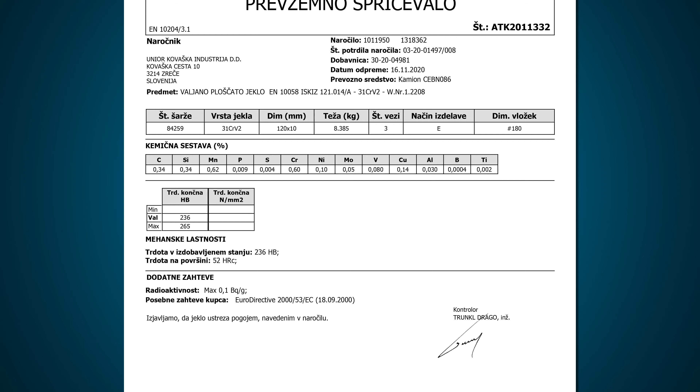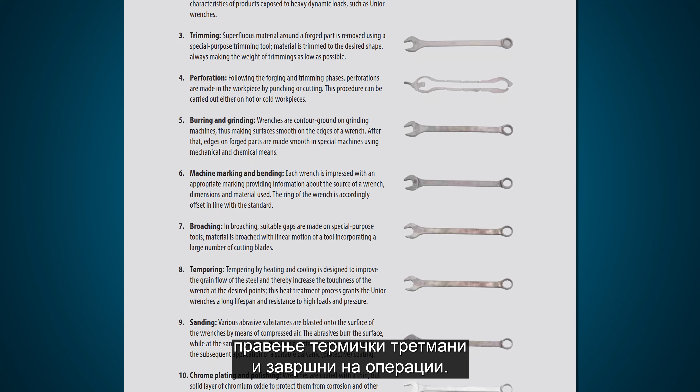All Unior wrenches are made from top-quality chrome vanadium material, which is tracked from the beginning, where the raw material is made, until the final production process when we hand over the product to its end user. During production of the wrench, we use different production processes. We start by cutting raw material, forging half products, machining to tolerances, doing heat treatments, and finishing operations.

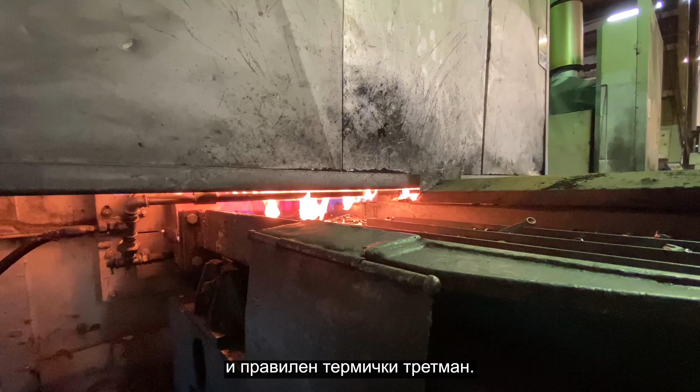The most important characteristics of the wrench are precision and strength. The precision of the working end of the wrench is guaranteed by a stable work process on modern CNC machines, while the strength of the wrench is achieved by using proper material and proper heat treatment.

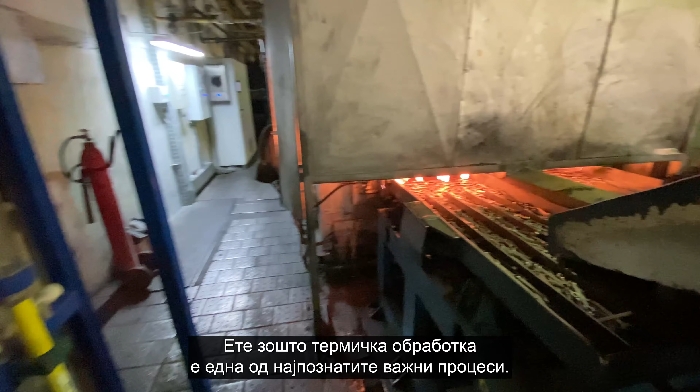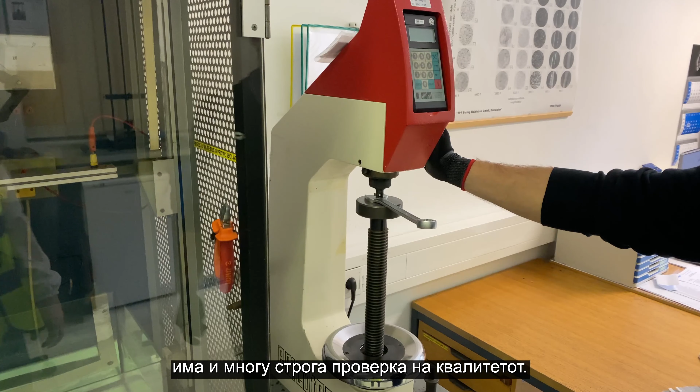As noted before, heat treatment determines the strength of the wrench. That is why heat treatment is one of the most important processes. We do our heat treatment in our own computer-guided furnaces and monitor the entire process at all times. At the end of heat treatment, there is also a very strict quality inspection.

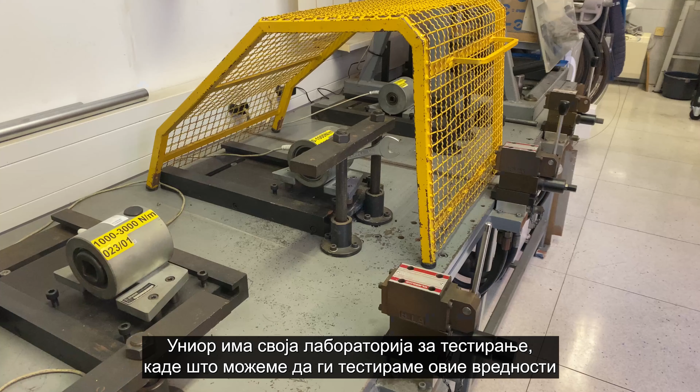Shape, size, and all the other measurements of the wrenches, such as thickness, length, width, hardness, etc., are determined by ISO standard. All Unior standard wrenches are made in accordance with ISO standards. The standards also determine what torque value each size of the wrench has to withstand.

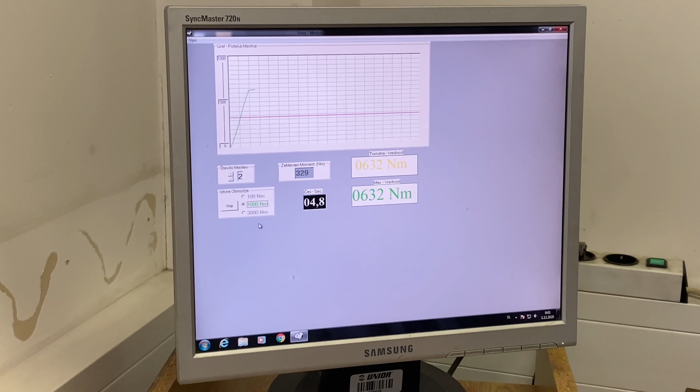Unior has its own testing laboratory where we can test these values for every produced series of wrenches. Unior wrenches are designed in such a way that the strength of the wrench exceeds the requirements of the standard for minimal torque by at least 50%, and at some sizes even more.

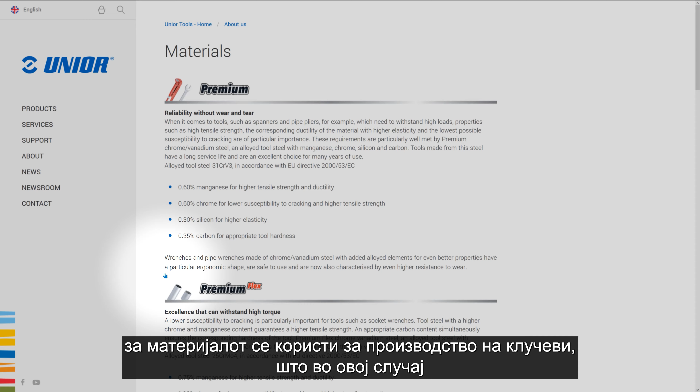When we click on the open-end wrench icon, the basic information about the wrench opens, namely about the material, the method of production, its surface, and information about the standard according to which the wrench is made. If we click on the material icon, we can find more detailed information about the material used to produce wrenches, which in this case is premium chrome vanadium steel.

This material is used for the production of wrenches due to its properties such as high tensile strength, the corresponding ductility of the material with higher elasticity, and the lowest possible susceptibility to cracking. If we return to the open-end wrench page and scroll down, we get to the dimensions of the wrenches. Each wrench has two different opening dimensions. Usually dimensions are consecutive, but different combinations of dimensions are also possible.

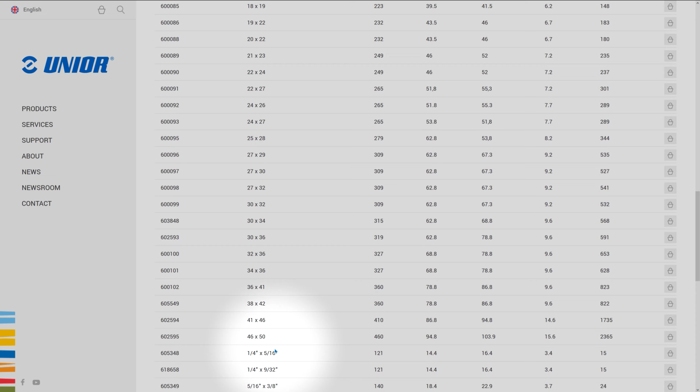One dimension can be combined with larger dimensions. For example, the number 13 can be combined with 10, 11, 12, or later with 14, 15, 17, and so on. Different markets and different maintenance work require different combinations of wrench, which is why there are so many different combinations. In addition to metric dimensions, wrenches can also be obtained in inch dimensions. If we scroll further down the page, we can also see a description of the different uses. Almost the same characteristics also apply to other types of wrenches.

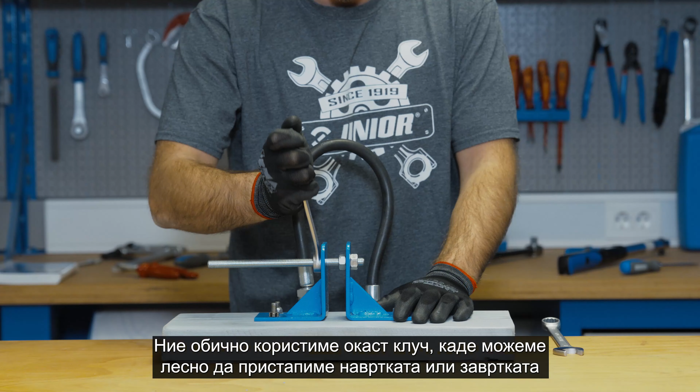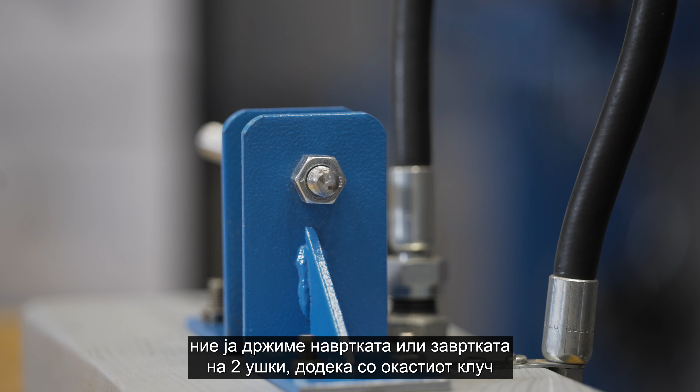The difference between an open-end wrench and a ring wrench? We usually use a ring wrench where we can easily access the nut or screw and tighten or loosen it. Where a ring wrench cannot be used to access the nut, an open-end wrench is used. The difference between the two wrenches is also that with an open-end wrench, we hold the nut or screw at 2 points, while with a ring wrench, we hold all 6 points on the nut or screw. In this way, the ring wrench can be used to tighten or loosen with greater force, while the possibility of slipping out of the nut or bolt is lower than with the open-end wrench.

The ring wrench is divided into several different subcategories. The most familiar to users is the offset ring wrench. We also have a flat ring wrench, a ring wrench with a ratchet and wrenches for special purposes, a wrench for scaffolding, a wrench for working at heights, and wrenches with a special profile.

In addition to the usual ring wrenches, we also have some ring wrenches for special purposes. An open ring wrench, which is used for installations, hydraulic lines, pneumatic lines, and in cars for servicing brake lines. A one-sided offset ring wrench, where several wrenches are used with one handle and is intended for screws that are tightened more than conventional screws. With this wrench, we can apply more torque as the handle is longer and we have more lever.

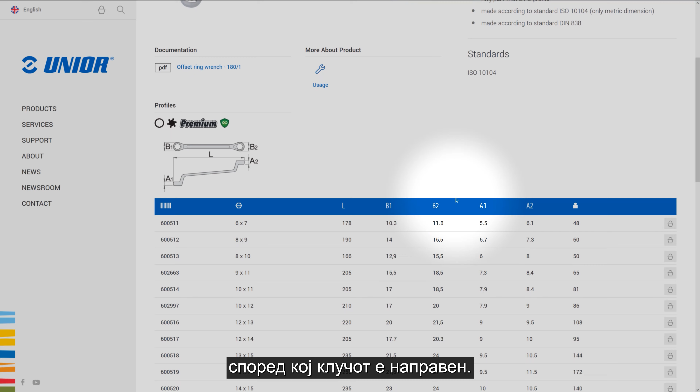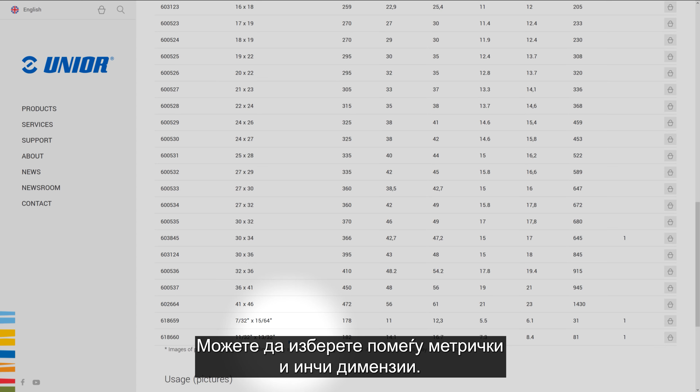A ring slogging wrench, insulated wrench, special wrench for quick work, or ratchet wrench. Here, we also find all the sets that contain a ring wrench. When we open an offset ring wrench, we see that we have 2 dimensions on one wrench. On the right side, there is basic information about the wrench, the material, the method of manufacture, its surface, and information about the standard according to which the wrench is made. At the bottom of the page, there is a table of dimensions and different combinations. You can choose between metric and inch dimensions.

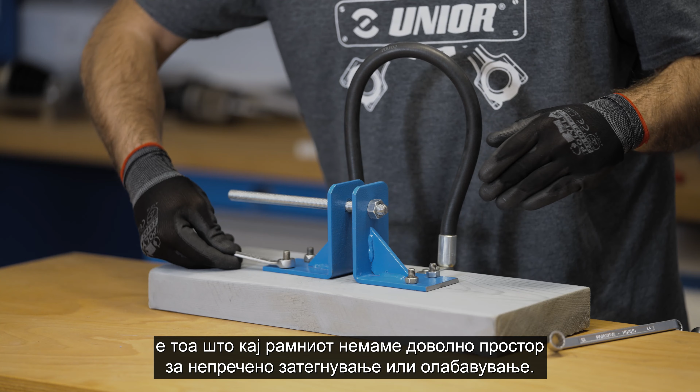In front of us, there are 2 versions of the ring wrench. The first one is a flat ring wrench. The second one is an offset ring wrench. The difference between these 2 versions of the ring wrench is that with a flat wrench, we do not have enough space for smooth tightening or loosening. Therefore, in such cases, we use a curved ring wrench, where there is enough space between the base and the wrench for smooth screwing or loosening.

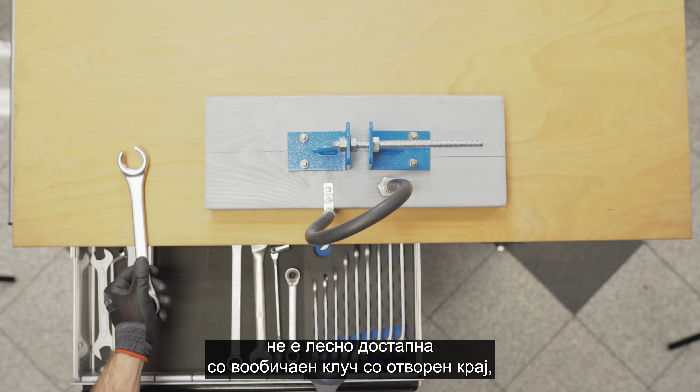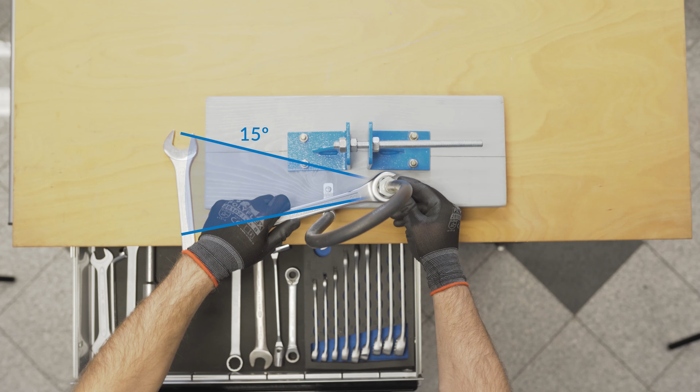In cases where the nut that we want to tighten or loosen is not easily accessible with the usual open-end wrench, we can use an open ring wrench. As you can see, with a normal open-end wrench, a 30-degree turn of the screw is required so that the wrench can be removed and again replaced at the same angle as the first time on the nut. When using an open ring wrench, only 15 degrees is required for optimal operation.

One of the subcategories of ring wrenches are combination wrenches, i.e. the combined open end and ring side. We have an open end wrench on one side and a ring wrench on the other. Both have the same dimensions. The wrench can thus be used for several different uses. A standard combination wrench exists in 2 options, a short and a long version.

We also have subcategories of special combination wrenches. The first of these is the ibex combination wrench, which is designed for quick work, the combination wrench for working at heights, the combination wrench with a ratchet on the ring side and for working at heights, and the combination wrench with a folding ratchet. On this part of the website, we can also find all the sets that contain these wrenches.

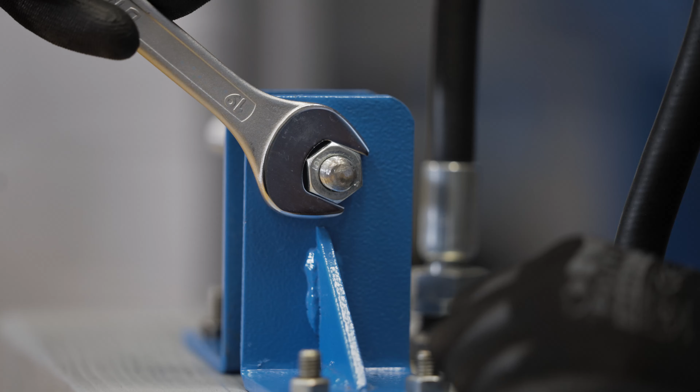Compared to an ordinary open-end wrench, working with an ibex wrench is much faster, as we don't need to take off the nut or bolt during tightening and loosening. The ibex combination wrench has a 3-point grip. That means the force is divided into 3 points on the nut and not only 2, as is the case with a regular open-end wrench. At the same time, this ensures a 100% grip for the wrench. The wrench profile ensures that the nut is safe from damage when tightening, as the force does not act on the corner of the nut.

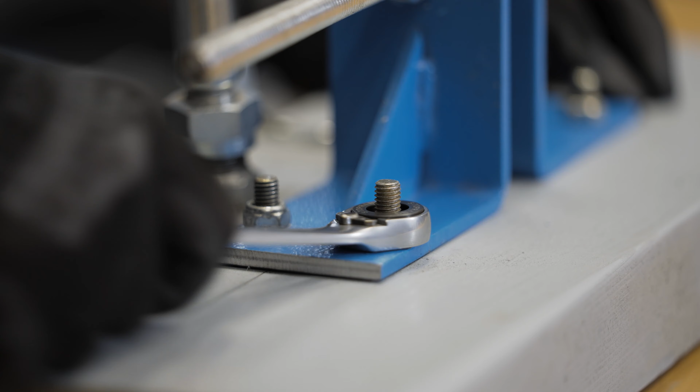The next category is ratchet wrenches, which we have in several versions, namely a flat ratchet wrench, a ratchet wrench for working at heights, a folding ratchet wrench, and a double-sided ratchet ring wrench. In addition to the above, we also offer special forms of ratchet wrenches that serve the same purpose. On this page of the website, we can also find sets that contain ratchets. The ratchet wrench is suitable for quickly tightening or loosening nuts or bolts. The advantage of a ratchet wrench is that you can easily change the direction of the operation of the wrench with the knob on the wrench.

The final category is socket wrenches, which you can find in different variants. On this part of the website, we can also find all the sets that contain these wrenches. The socket wrench is another in a series of wrenches that are suitable for quickly tightening or loosening nuts or bolts. The advantage of the socket wrench is in its adjustable joint. Thus, it can act as a socket wrench on the screwdriver handle or as a normal socket wrench.

The advantage of a bent socket wrench is its special shape, with a hole in the wrench joint. This shape of the wrench is intended for tightening or loosening the nuts on the threaded rods, i.e. in cases where the nut on the threaded rod is too far away and cannot be reached with an ordinary socket set.

The wrench category also includes insulated wrenches, slogging wrenches, adjustable wrenches, hook wrenches, tubular wrenches, HX and TX profile wrenches, car service wrenches, and wrenches for working safely at heights. More about these wrenches in the following video presentations.